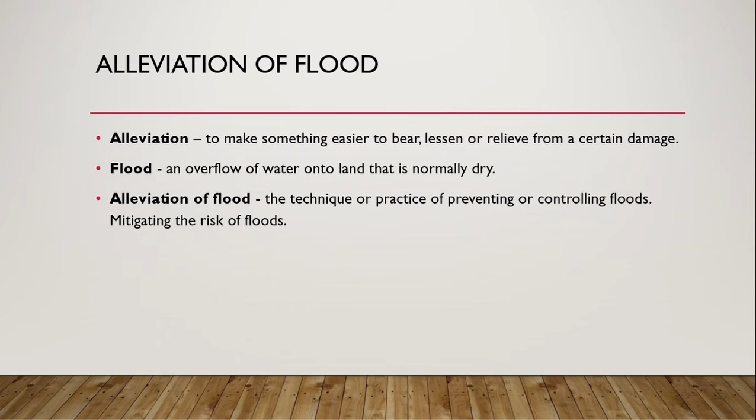Mitigation and risk transfer measures. Mitigation is defined by the Federal Emergency Management Administration as sustained action taken to reduce or eliminate long-term risk to people and property from hazard. Traditionally, mitigation is divided into structural and non-structural options. But in this topic, we'll only be focusing on non-structural options.

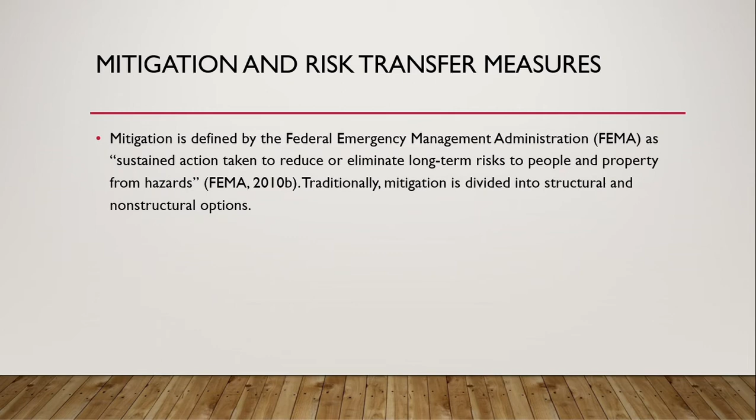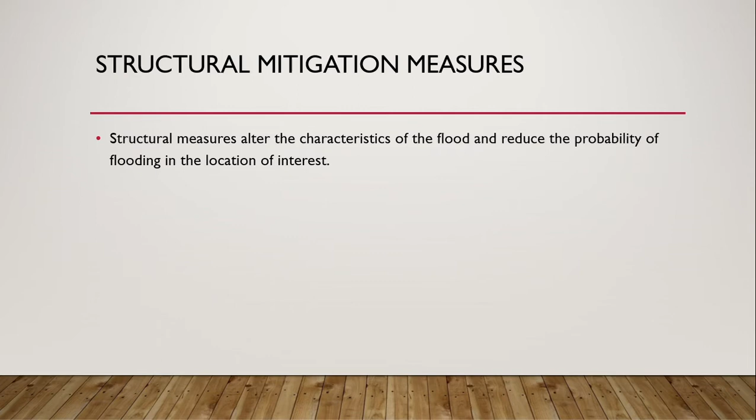So first is the structural mitigation measures. Structural measures alter the characteristic of flood and reduce the probability of flooding in the location of interest. And some examples of structural measures are levees, flood walls, seawalls, dams, floodways and spillways, channel, controlled overtopping, levee armoring, and seepage control.

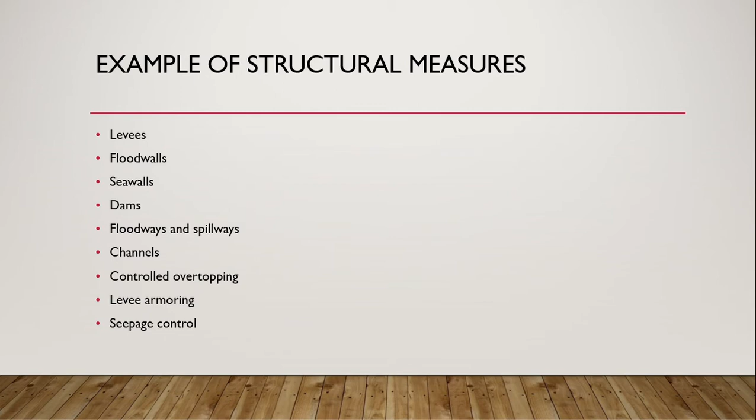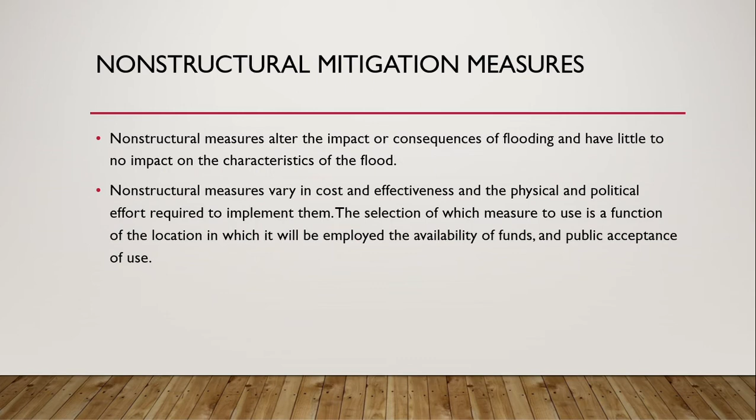Next is non-structural mitigation measures. Non-structural mitigation measures alter the impact or the consequences of flooding and have little to no impact on the characteristics of the flood. Non-structural measures vary in cost and effectiveness and the physical and political effort required to implement them. The selection of which measure to use is a function of the location in which it will be employed, the availability of funds, and public acceptance.

Examples of non-structural mitigation measures are structure elevation, natural systems, risk mapping, hazard forecasting, early warning systems and emergency plans, land use planning and zoning, construction standards and building codes, acquisition and relocation, and insurance.

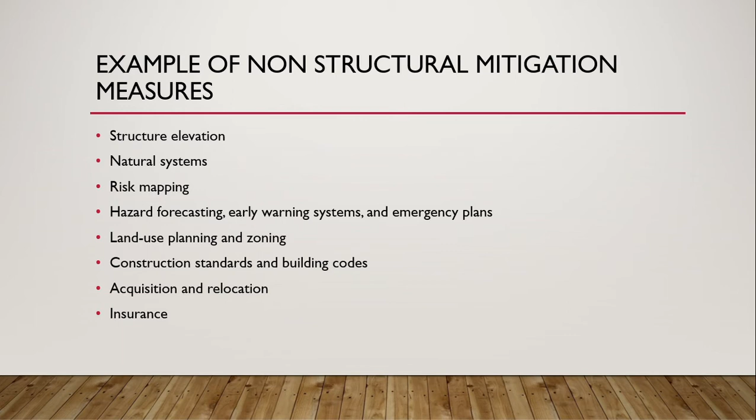First is structure elevation. By raising a structure above the expected flood level, flood damages can be prevented. Behind an accredited levee, if a flood greater than 1% annual chance flood occurs, there could be some damages to such elevated properties but considerably less than if the structure had been at the base flood elevation.

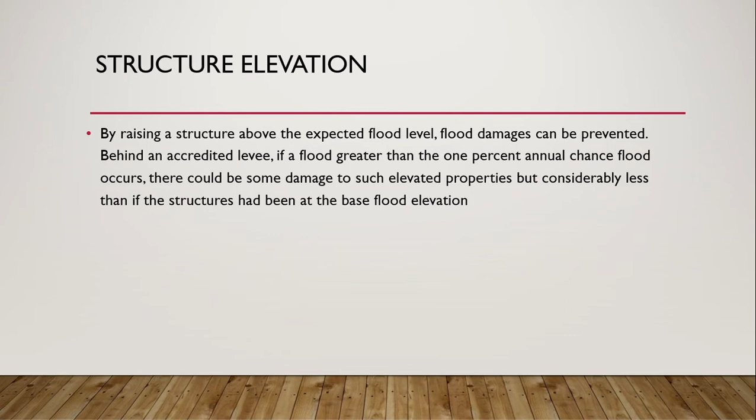Also, elevation includes moving essential equipment from low-lying elevation within a structure to the areas that would not be subjected to flooding. Having building support systems such as computers, heating and air conditioning units, and electrical stations located in the basement areas puts at risk the functionality of the entire building.

Next is natural systems. Naturally existing, restored, or developed wetlands, as well as land in periodic cultivation, can store overflow waters from riverine flooding and help reduce downstream impacts. Wetlands also provide a natural barrier to storm surge inundation.

Coastal sand dunes protect structures built behind them and help slow down coastal erosion and also the immediate impact of rising storm surge. Floodways built to relieve flood pressure can also provide ecosystem benefits. This natural system can be effective in reducing flooding behind levees with interior drainage problems.

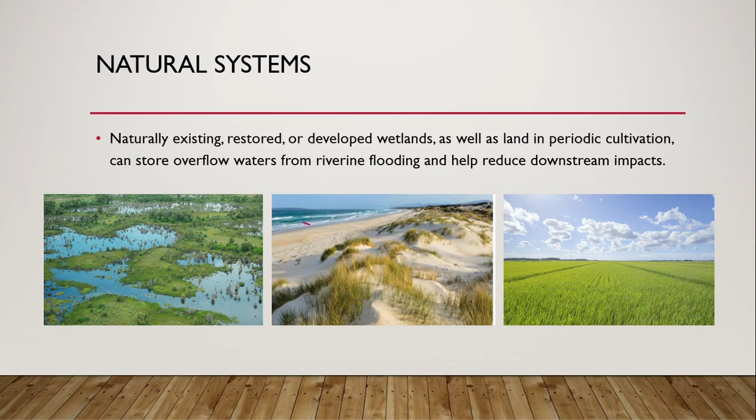So next is risk mapping. Flood risk mapping is the process of establishing the spatial extent of risk by combining information on probability and consequences. Risk mapping requires combining maps of hazard and vulnerabilities. Accurate mapping of risk provides those living or working in flood-prone areas in front of or behind levees with the information necessary to make rational decisions in developing their personal or corporate flood risk management strategies.

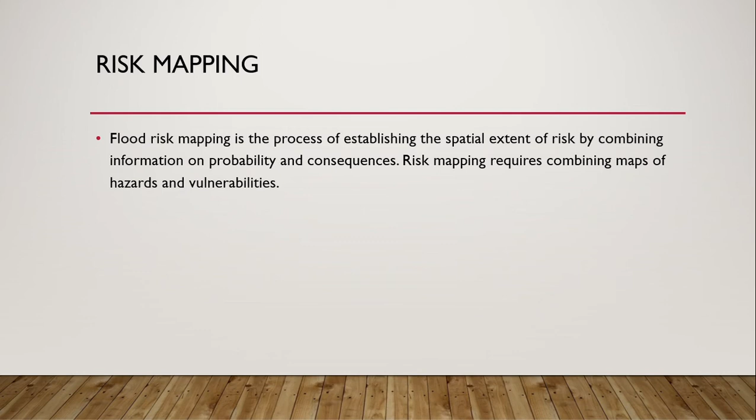Next is land use planning and zoning. Land use planning refers to the practice whereby landowners, developers, municipalities, and other professionals collectively work to approve a land-based project, following principles that promote an appropriate social and environmental effect, while also employing resources efficiently. Wise land use is at the center of non-structural flood mitigation activity and is an effective tool for reducing risk at the community level. Land use planning implements public policy to direct how land in a given area is used.

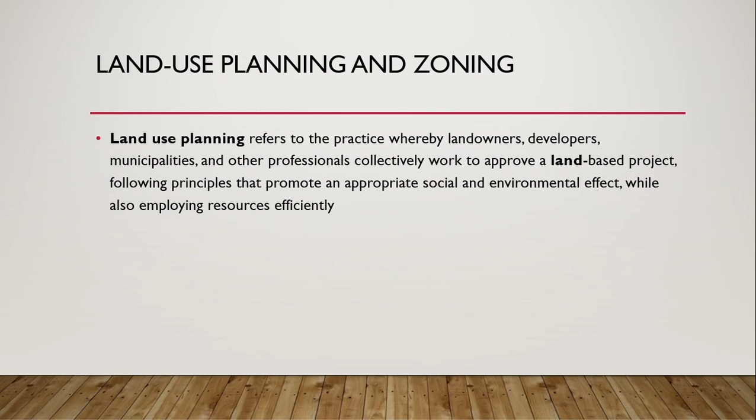Next is construction standards and building codes. Construction standards and building codes can be developed at any level of government, but they are enforced at the local level. While codes provide for public safety, they also prescribe practices and measures that directly address known causes of disaster damages. Damages can be significantly reduced by attention to modern construction standards and building codes.

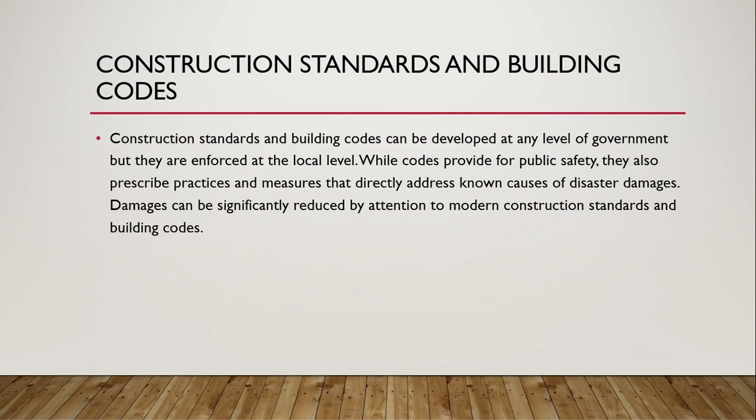Next is acquisition and relocation. Acquisition or relocation of properties that are repetitively flooded, substantially damaged, or need flood-related project construction have been supported by FEMA and USACE, allowing many communities to deal with the challenges of these frequent flood losses. When land is not suitable or only marginally suitable for development or agricultural activity, that land can be acquired and placed into public use for either environmental or recreational purposes to enhance the overall quality of life in the community.